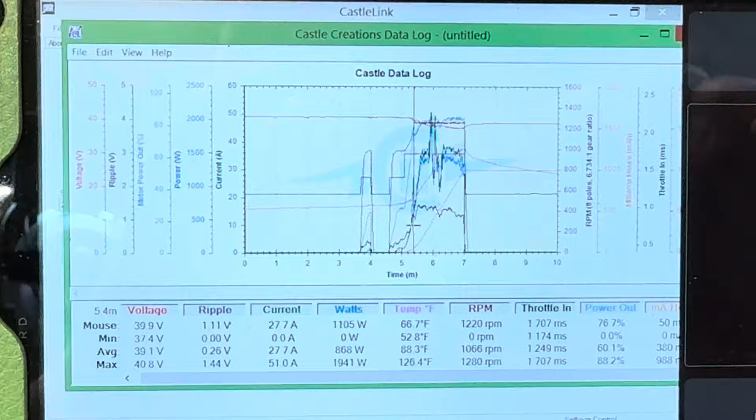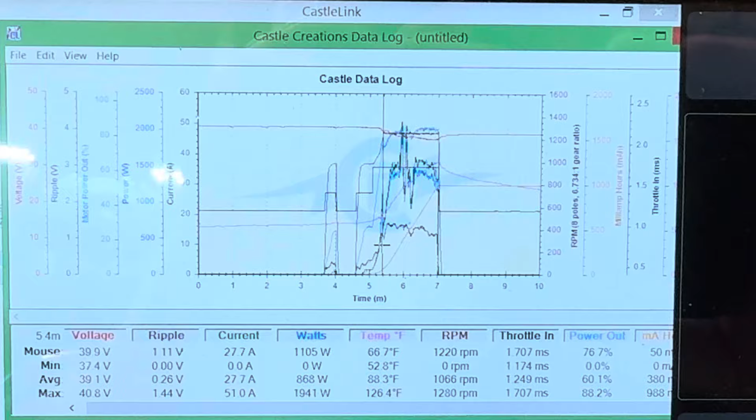I hope you enjoyed the time-lapse photography of the video, because I didn't have my camera set up right. But I got back here looking at trying to find out why the damn thing started to dump its RPM right at the very end of the flight, which was not very long. I mean, I only had it on there for a minute and a half, I think.

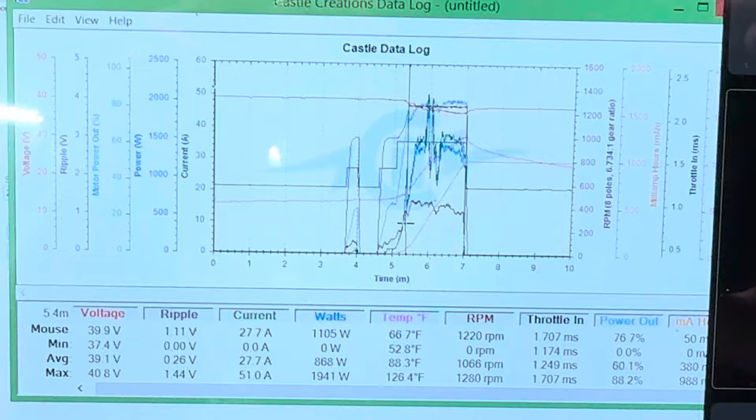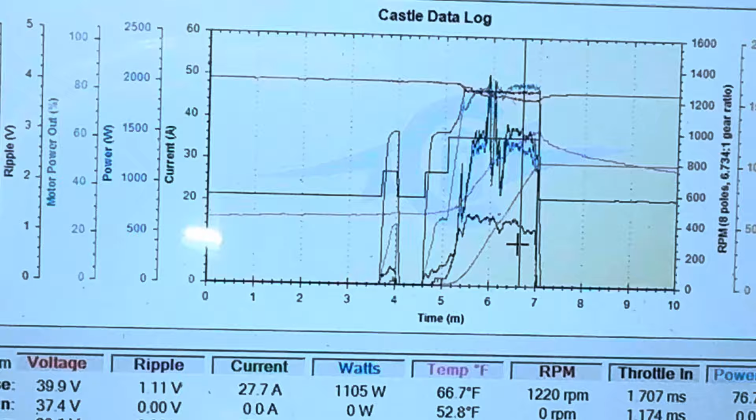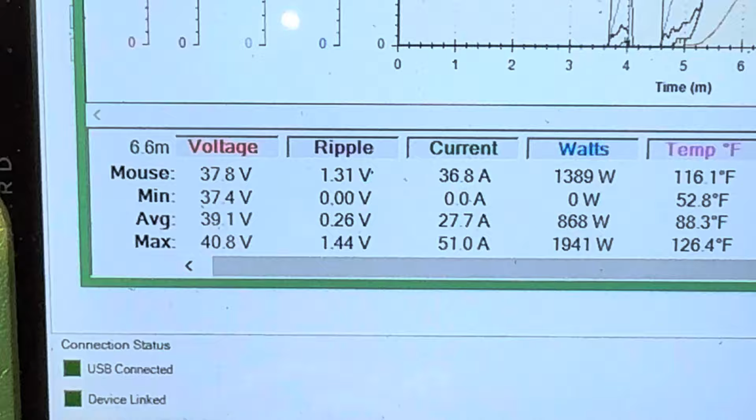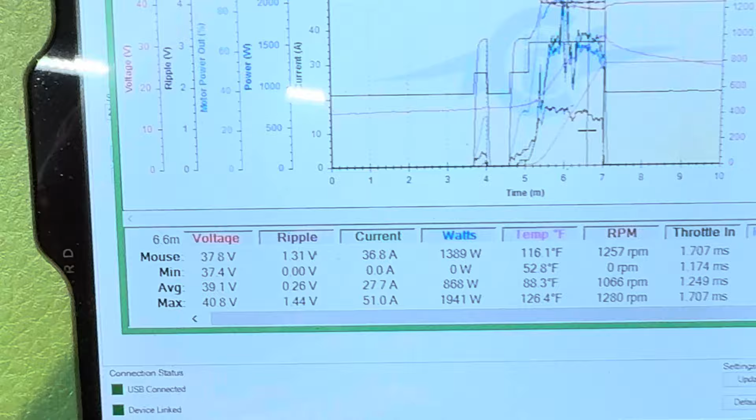And so you can see there is, well, let's look. They got voltages which are really good on everything. Let me see if I can move this to a normal type flight, which was going on there. Okay, so my cursor is right there, you can kind of see it pop up. And so we're at 1389 watts, 36 amps. My ripple is only 1.31 volts, which seems a little bit high. I don't think that is out of range for what that could be, but my voltage is still 37.8 volts.

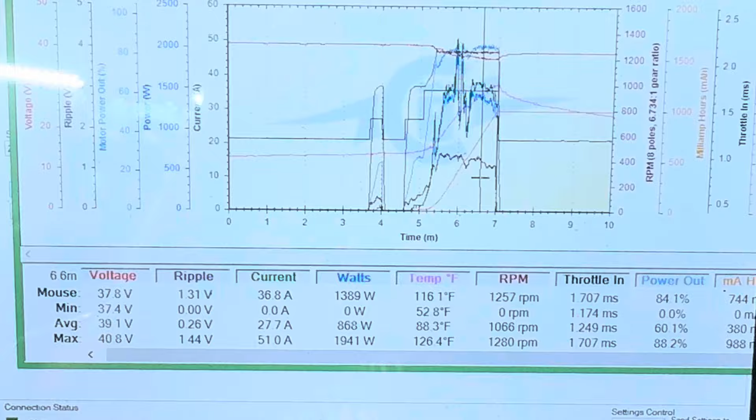And this is a 10S setup, so this is kind of new for me, I don't normally run 10S. Temp was fine. RPM says I'm at 1257, which is, I think I set it at 1250. So we're really close.

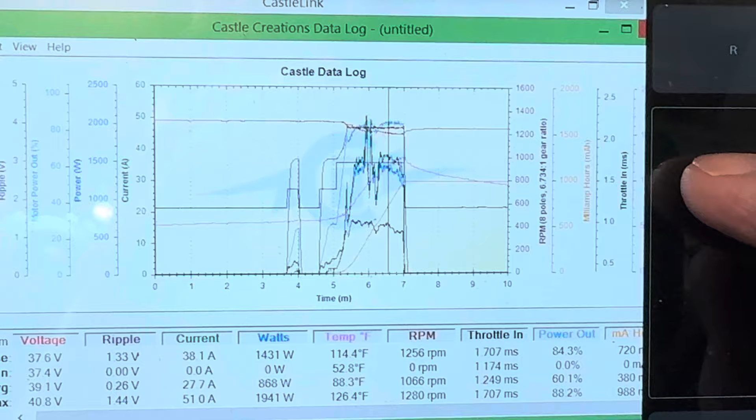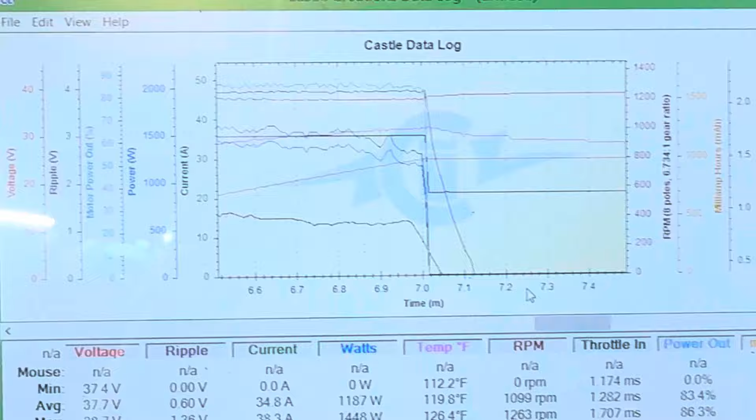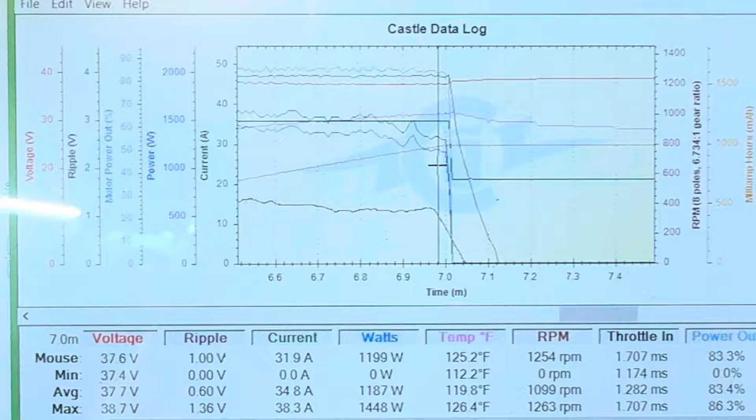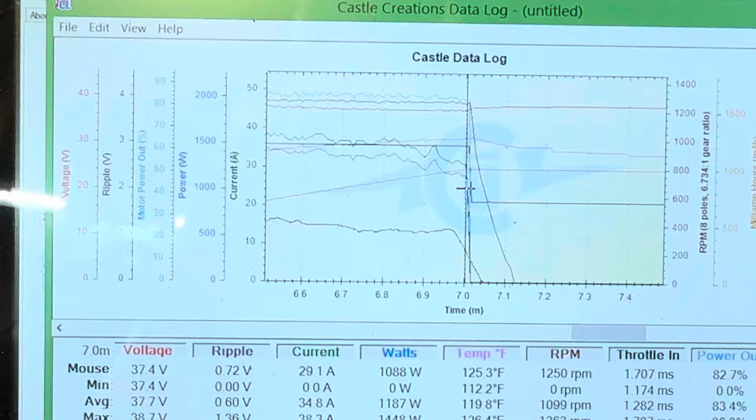But if I go in here, and I'm looking at this last part right here, I wanted to see what was causing it to kind of go down. Let's see if I can get this, and let me put my cursor right here, see what's going on. As you can see, right where I shut it off, it's starting to go down. Even my RPM is still at 1254, it's starting to go down. If I move the cursor over a little bit more towards that spot, it's starting to drop. See, now it's at 1250. So I did hear the RPM dropping, you couldn't see it because the video was showing a time lapse instead of video. Dumbass.

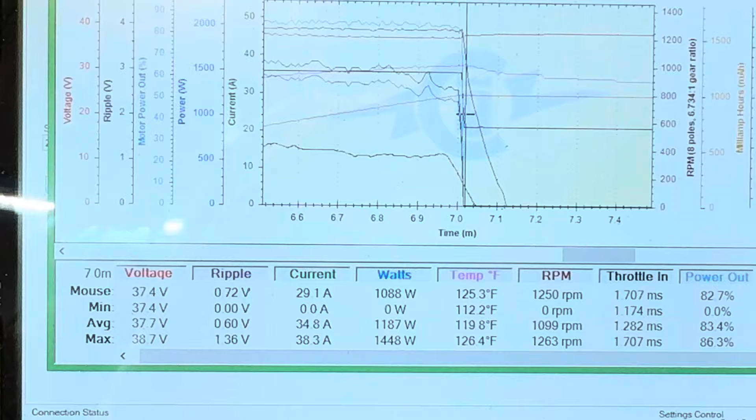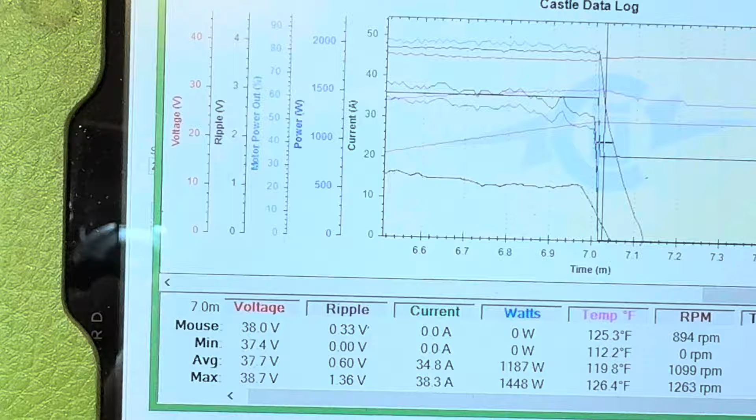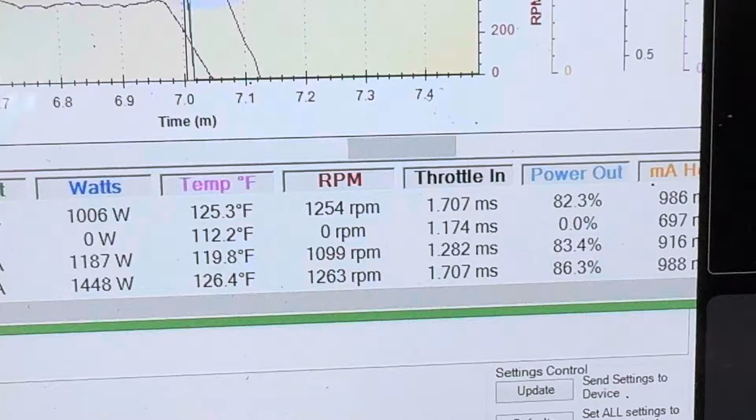And then right where I landed, if I put it out here, RPM was really starting to drop off, but I had already shut it off by that point right there. So my inputs for my governor, if I scroll that right there, my input's still at 83.2 or 82.3, and my little dyslexic coming in.

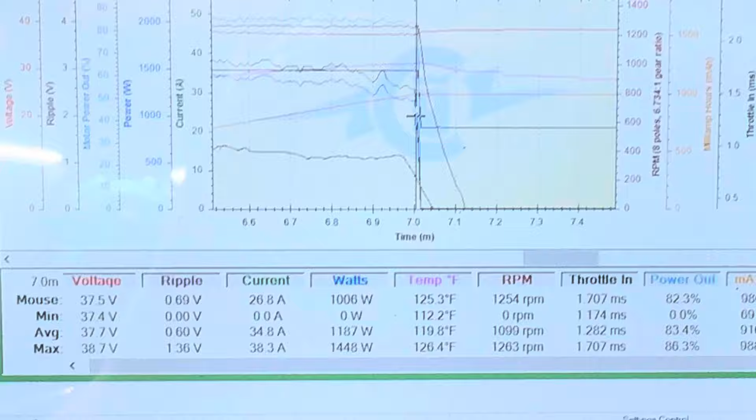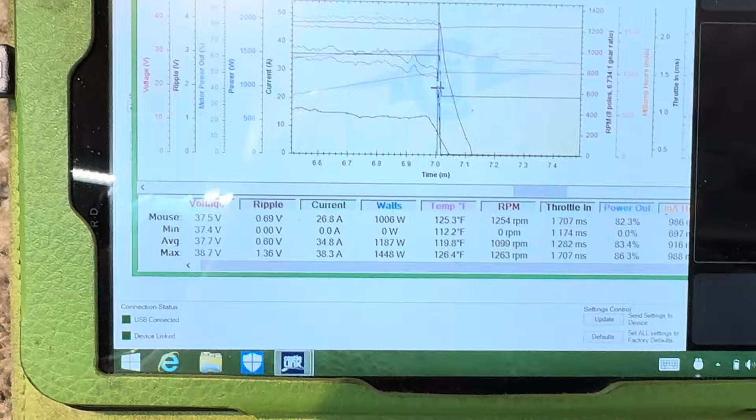And I'm still at 1254 RPM, but it was dying off, and unfortunately you guys couldn't see that. The RPM dropped off enough that I went, oh shit, I thought it was going into a soft cutoff. But everything I'm seeing here is still within normal range. It just started dropping off, and I landed.

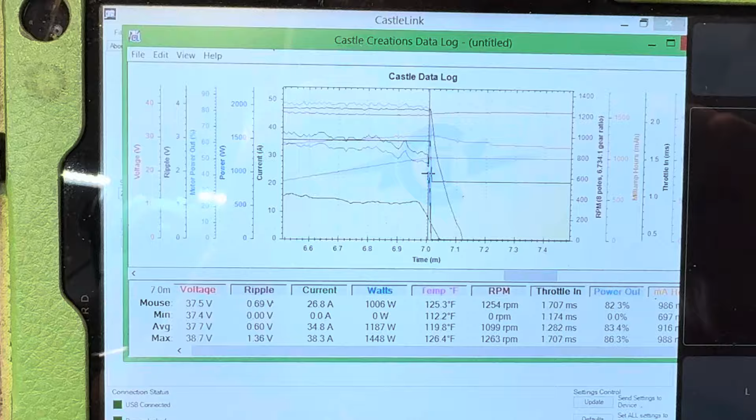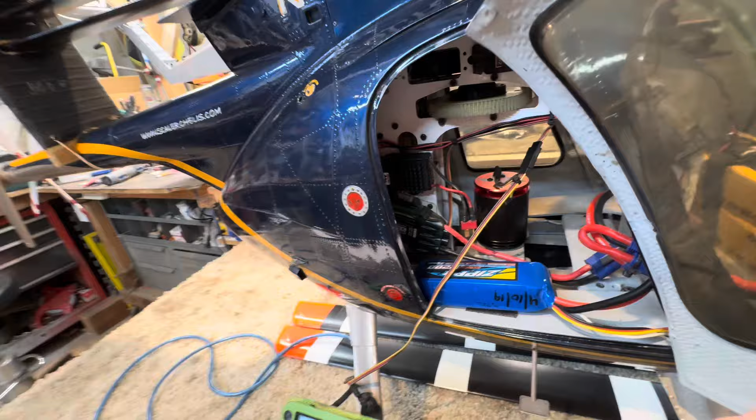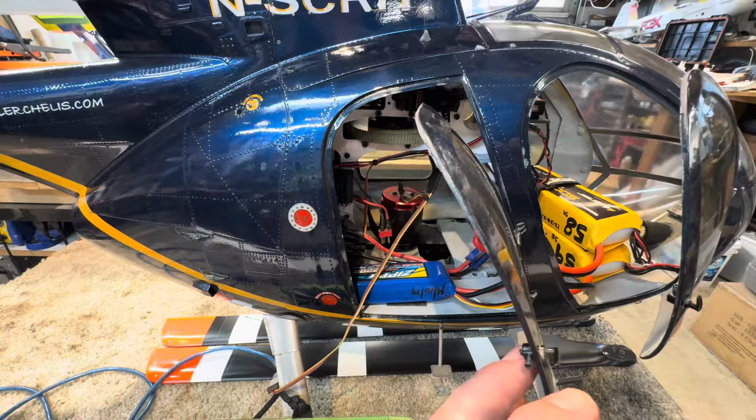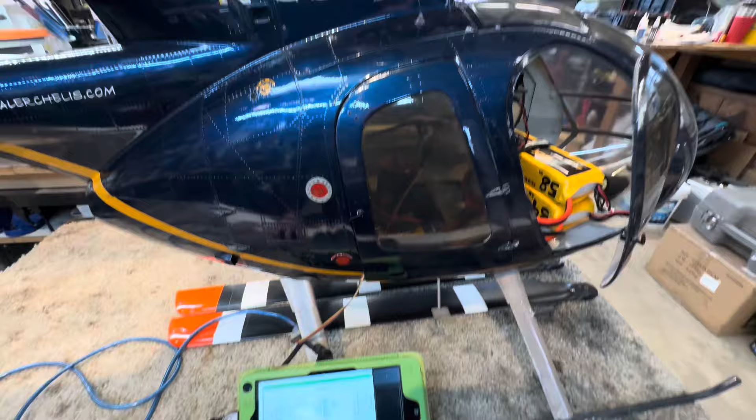So I think what we're going to do is pull out this old ESC. That is an ICE2 HV 80 in there, so it's an 80 amp ESC, but maybe it's just not up to the task. So I have another one that I took out of the poor Red Bull, and I'm going to throw it in here and put the same settings in. Without doing anything else different, I'm going to load the program I currently have in this one, so it'll be all the same settings, and we'll see if it makes a difference.

Am I building something? Not really. Just trying to fix it.

Well, good morning, kids. We're out here playing today. It's a nice day, look at the sunshine.

On the last episode of this old MD-500 redo, the ESC, I think, might be an issue. I'm hoping it's the issue. So I took out the 80 amp ESC and stuck in a newer 120. Let's see if that thing will actually work. Let's see if it works. Clean it all off.